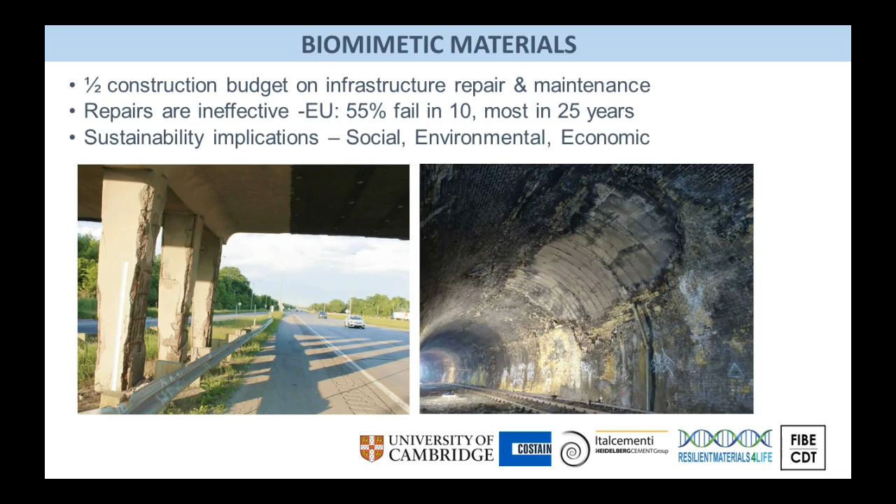Also environmental, we've heard that concrete is one of the most damaging construction materials, and of course economic, due to budget constraints. So over the last year, scientists have looked to develop what we call biomimetic materials. These are basically materials that are inspired by nature, by all the living organisms. And we mean materials that can adapt and respond to their external environment. And in the context of construction materials, we mean materials that can self-sense their condition, they can self-diagnose the condition, and then repair in case they're damaged.

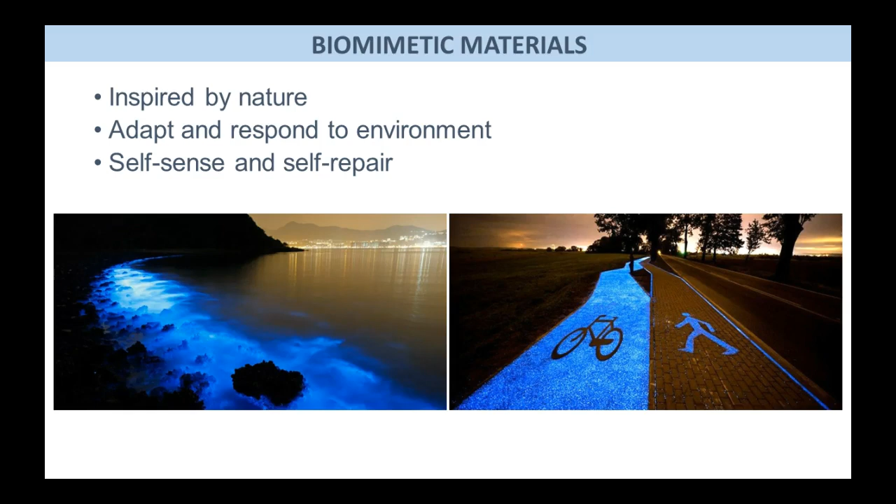And we have already seen some commercial success stories. For example, scientists have been inspired by organisms that glow in the dark to then develop pavement that glows in the dark in the same way. I work as part of a larger group of PhD researchers called Resilient Materials for Life. And this is a collaboration between the University of Cambridge, Bath, Cardiff, and Bradford, and we are funded by EPSRC.

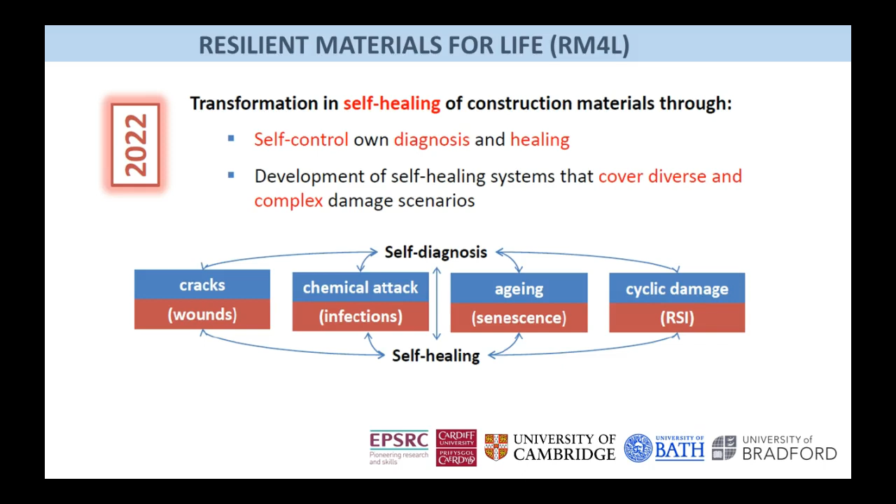And the aim of the program is that by 2022, we will investigate biomimetic materials that can self-diagnose their condition, and then they can self-heal if they're damaged. And we're working across 4 different themes that you can see here. So one is physical cracking, chemical attack, aging, and also cyclic damage. So we are looking to develop materials not only that self-heal, but can also self-diagnose without the need for an external intervention. So I've mentioned self-sensing. What do I actually mean by self-sensing?

You're all in this room very familiar with sensor technologies. However, some of the challenges with external sensors, that are attached or embedded in the structure, is that often they're associated with very high costs to either install or to maintain across the life cycle of the project. Some of them also lead to very low sensitivity or incompatibility with the actual structure. And also, the sensors themselves sometimes are not very durable, so they might not last for 100 or 120 years that a structure is expected to last. And as Sakthi mentioned earlier, visual surveys are still the norm for pretty much every infrastructure owner. So they depend on an engineer actually going out once every 2 or 4 years to physically inspect if there's any cracking.

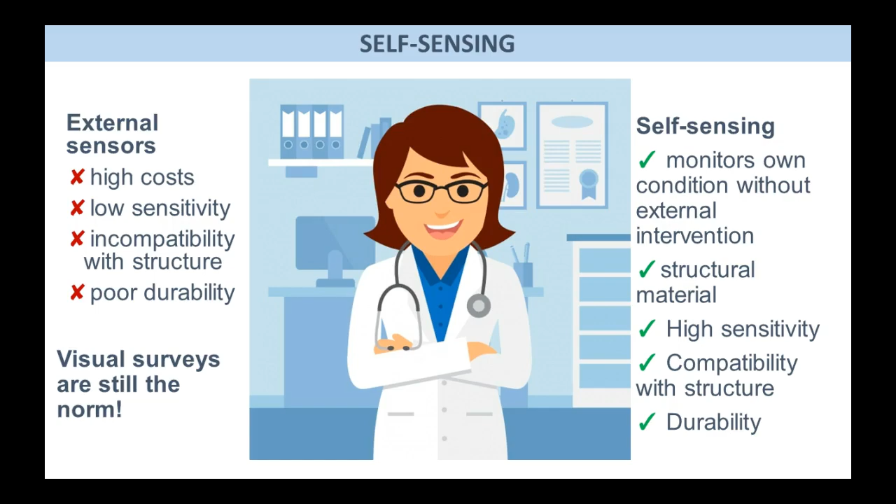But what we mean by self-sensing is that the structural material itself can monitor its condition without any external intervention. And the good thing about this is that the sensing material is the actual structural material. So it has natural compatibility with the structure, natural high sensitivity, and of course durability. So as an example, what I'm looking on is self-sensing concrete. So the concrete itself remains a structural material, but it also has the added-on functionality of sensing its own condition. And to generate that self-sensing aspect, I'm using the nanomaterial of graphene.

So graphene was isolated back in 2004 by the exfoliation of graphite. And then the researchers that discovered graphene won the Nobel Prize in Physics for their discovery. So graphene has some very unique properties. It is the thinnest possible material that you can find, but also at the same time it is the strongest known material on Earth, and it is estimated that it is roughly 200 times stronger than structural steel. It is extremely lightweight as well, which is another benefit for its use in structural composites. It has very high Young's modulus and flexibility along with fracture strength. And another useful property is that it has some barrier properties that we can explore for durability applications.

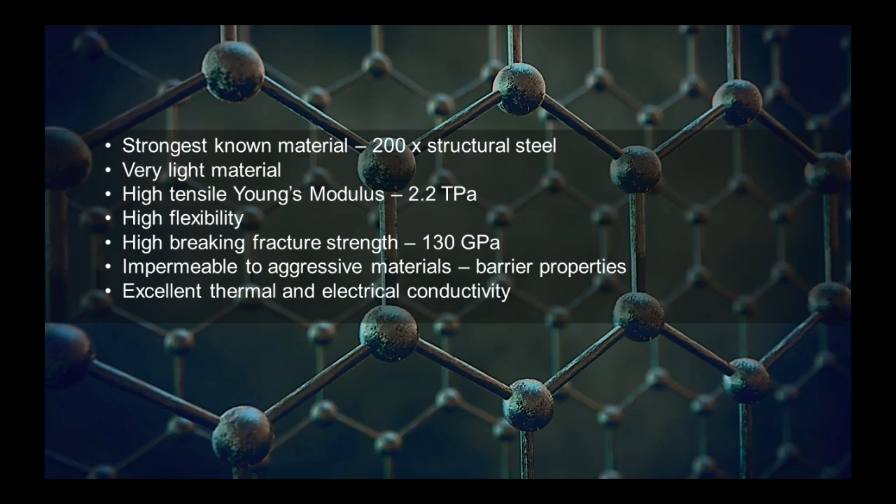And the property I'm looking to take advantage of is the electrical conductivity. So graphene is one of the best electrical conductors, so I can use that to generate the self-sensing mechanism. And it is important to point out at that stage that over the last 5 years at least, there have been a lot of papers on graphene in various composites, not only concrete but also steel and polymers.

And when people say graphene, there are actually many different graphene materials. So graphene doesn't only mean one thing. We have this graphene, which is a graphene that was discovered back in 2004, and this is a single-layer graphene. We also have graphene oxide, which is the middle one. The graphene oxide has oxide groups that then allow it to mix very well in water and hence concrete. We also have reduced graphene oxide, which again is another type of graphene.

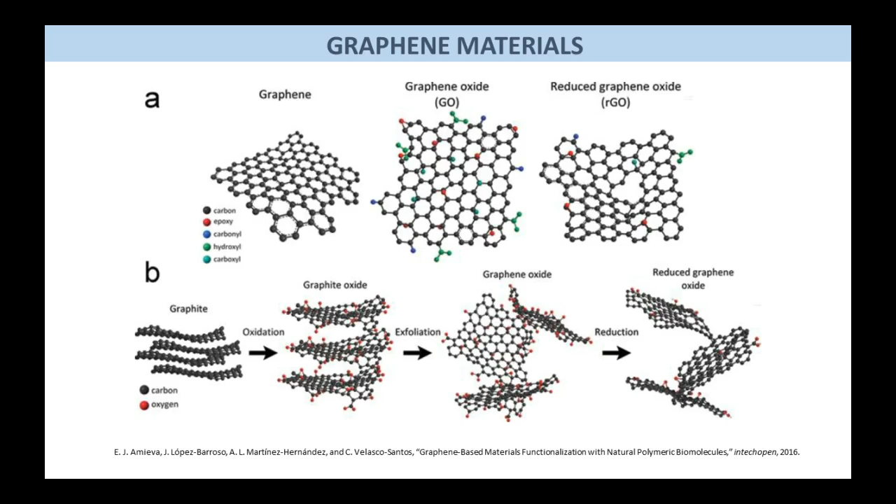And unfortunately in the literature it's not always clear what type of graphene is used, how many layers it has, and all these properties actually affect the resultant properties of the composite at the end. And in terms of graphene cement composites, I'm using a multi-layer form of graphene, so not the very thin, one-layer graphene, because that would be prohibitively expensive for anything in concrete. But I'm using something called graphene nanoplatelets, which have about 40 nanometers thickness.

And there is some general agreement in the literature as to what is the effect of graphene nanoplatelets when they're added in cement mortar or cement paste. And in general, the fluidity of the mix decreases dramatically. I think all authors agree on that, because graphene is a nanomaterial and it is very difficult to mix. And also we have seen improvements in strength and then a consequent improvement very often in the durability parameters as well. And very importantly for me and my self-sensing is that the electrical conductivity increases significantly when you mix graphene in your concrete.

However, the challenge in the literature is that authors use different percentages of graphene. They get different percentage improvements in strength. And also, even if people use 0.1% graphene, let's say, some found a 5% increase in strength, and others found a -10% change in strength. So there is still not a definitive answer as to how much graphene you need to add in concrete and whether that graphene has a beneficial effect, especially in terms of strength.

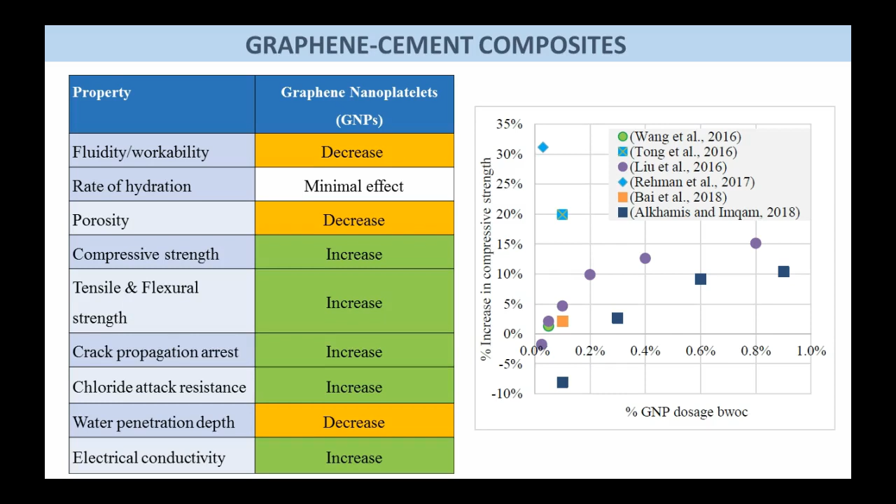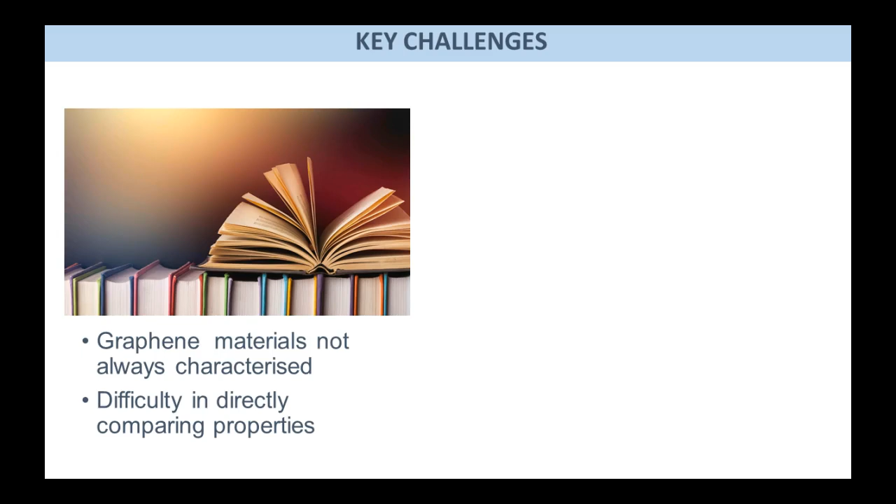So over the last 2 years of my PhD, I've tried loads of different mixing methods, loads of different chemicals and mechanical methods to find an okay method to disperse it homogeneously. And we've done a lot of work with that, with Heidelberg Cement, to understand that homogeneity when you mix.

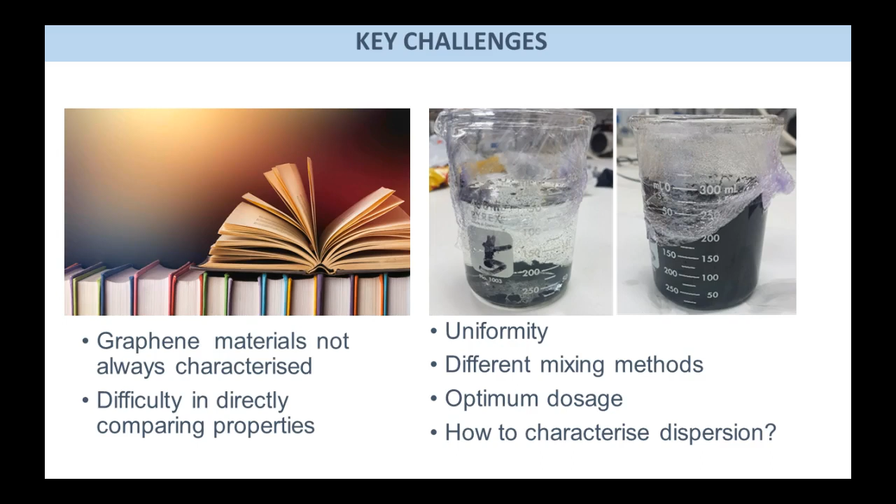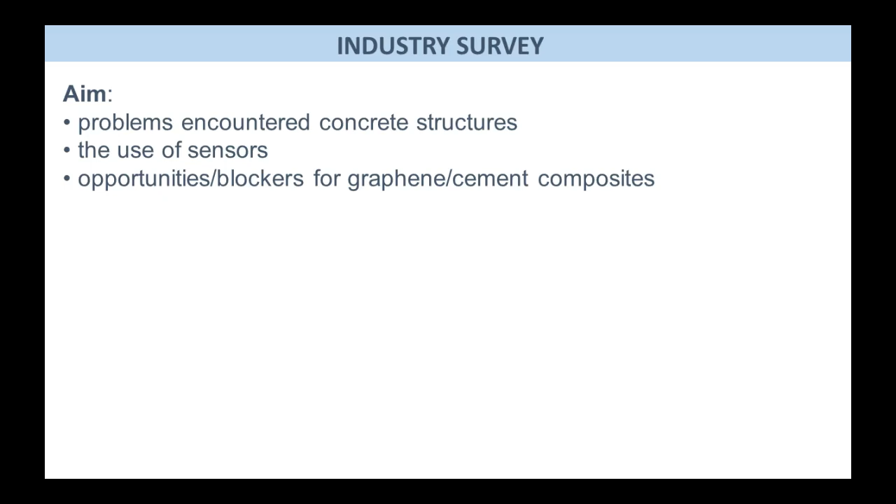And then we ran an industry survey last year, and a lot of people in this room have answered, so thank you very much. And we tried to understand what are the actual problems encountered with concrete structures and the current use of sensors, and whether graphene could help in solving some of these challenges. So we wanted to identify the high-value areas where we could make our graphene work for the industry.

Just a bit of background: I sent my survey to around 300 to 400 people in the industry. I've got 78 respondents back. Due to my contracting background, I guess over half are from contractors, so the results might be biased a bit from that. We had over 55% with 15 years experience, and most of them are UK based as well.

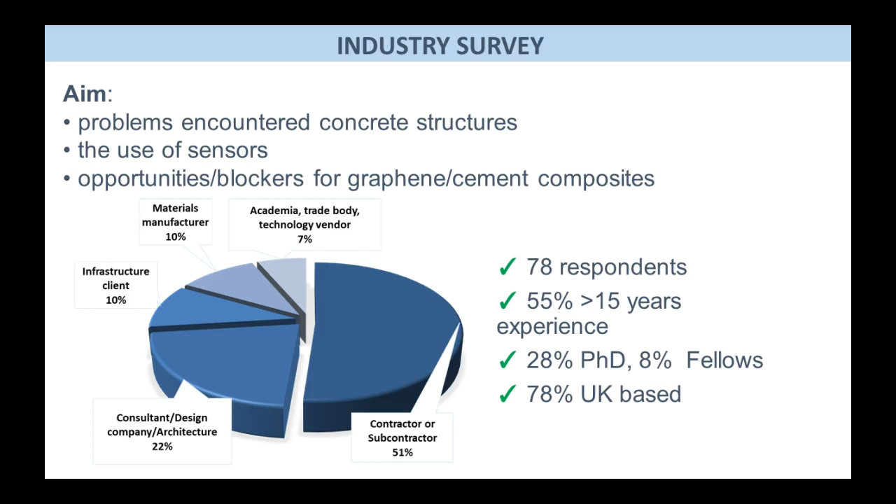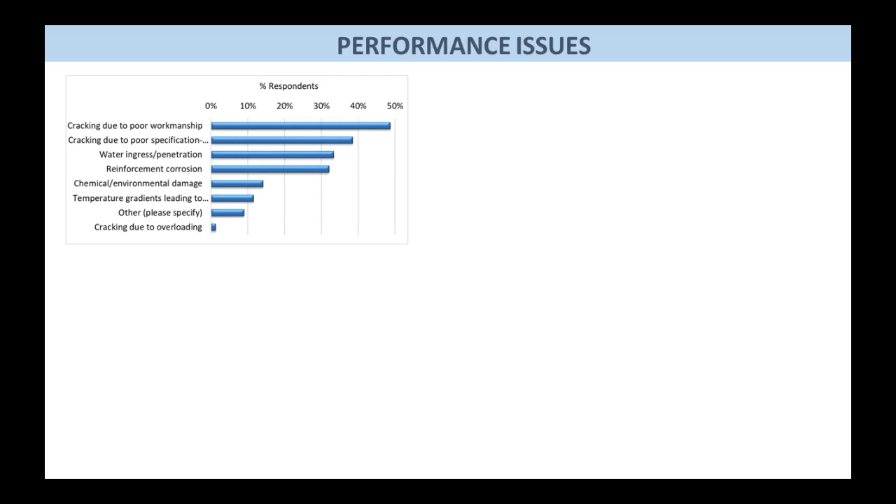So in terms of concrete performance issues, the biggest challenge, and maybe that comes from the contracting aspect, is that cracking due to poor workmanship was identified as one of the key challenges in terms of damaging concrete. Also cracking due to poor specification, followed by water ingress and penetration. And what was interesting to see is that any cracking or any defect in concrete in most cases led to immediate repair of the structure.

And then it was followed by enhanced monitoring of the structure. So actually, a lot of the infrastructure owners need to go out and repair immediately or improve their monitoring frequency.

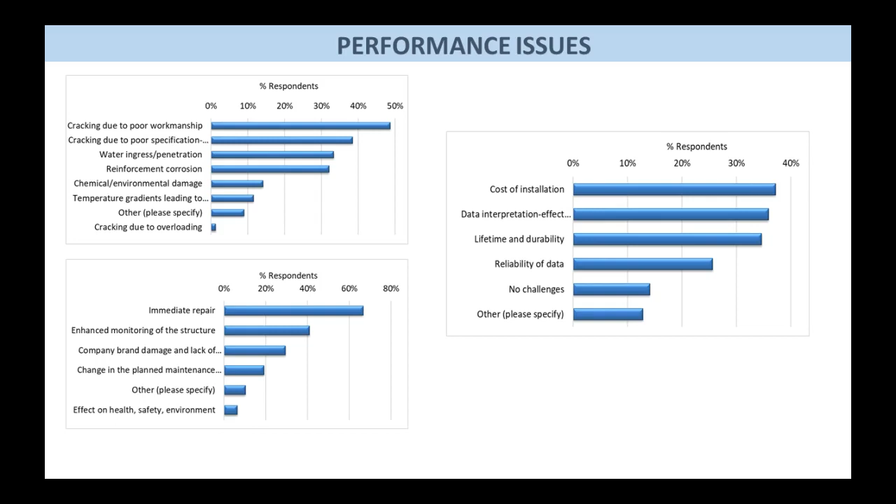And when I then asked about these sensors, if they have identified any key challenges, the cost of installation of the sensor is very high, followed by the data interpretation. So what happens very frequently is that we install sensors, but then the actual engineers don't know how to interpret the data and they don't know the right time to intervene. Of course, lifetime and durability of the sensor was another concern, followed by reliability of the data. And it was encouraging to see that 15% found no challenges, so that's good.

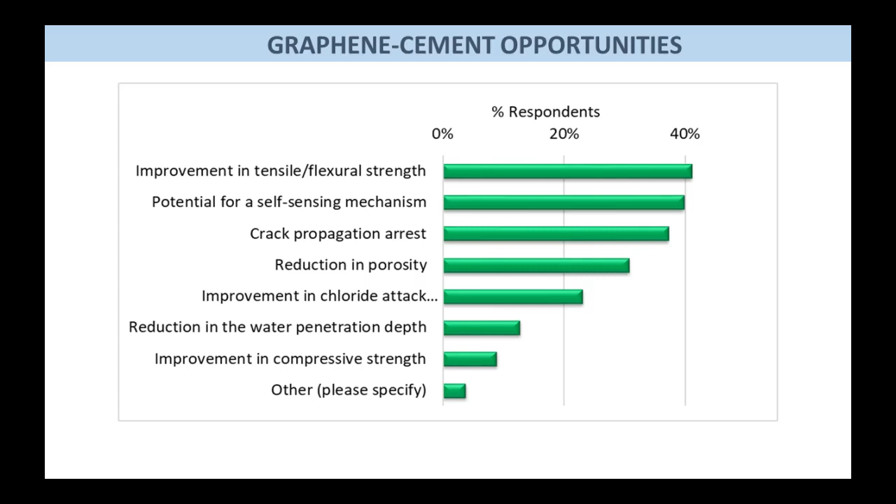So when I then asked about what are the biggest opportunities, what do you want a graphene cement composite to do for you, you can see that the biggest priority, these two, were really an improvement in tensile and flexural strength, followed very closely by a self-sensing mechanism. So what I get from this graph is that the industry is not really interested in an improvement in compressive strength, because you can get strength improvements with most of the admixtures that you currently have. You can get it through a robust mix design. What people want to see is an improved functionality that you wouldn't have with a change in the mix design.

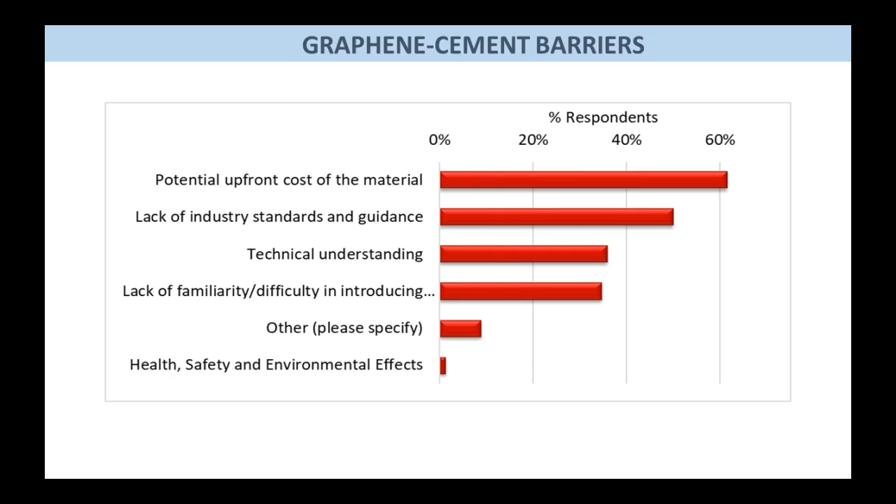And in terms of barriers, this keeps coming up in every single presentation. The cost of the material is the perceived main blocker of introducing graphene as a nanomaterial. Also, this is followed by the lack of industry standards. The industry is very conservative, so it is very hard to convince anyone to even take a trial on something like graphene in concrete yet. So the standardization bodies really need to drive the introduction of new materials. And again, lack of technical understanding, I guess, is expected as it is a very novel research area. I was very, very surprised to find that health and safety and environmental effects weren't really a concern for people.

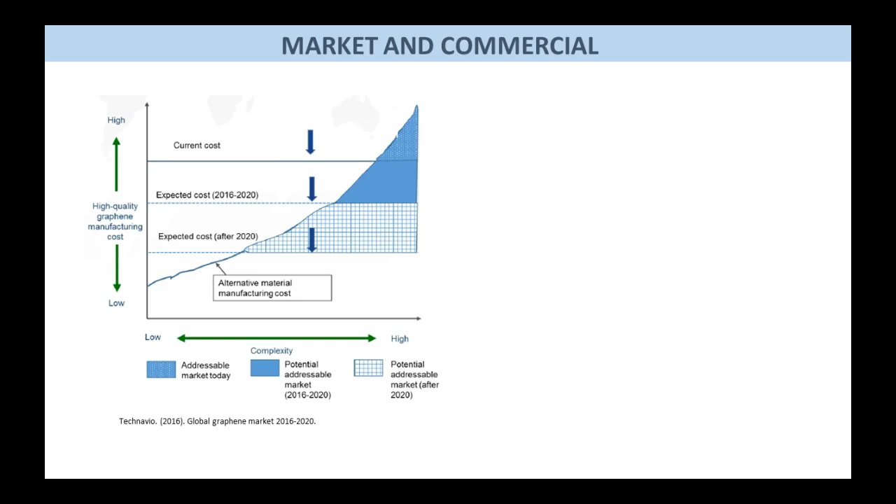So just to be clear on the cost, graphene currently is very expensive. It is an expensive material to use, but it also depends a lot on the actual graphene type that you use. So if you use the ultra-thin graphene, this can cost over £1,000 per gram, and is used by companies like Samsung, Apple, to use in advanced electronics. If you use the graphene I use for concrete, it is much, much cheaper. It's roughly £200 to £300 per kilo, so we are talking about a completely different scale. Graphene is extremely dependent on the manufacturing process. So if you don't want the super pure graphene, then the cost comes down significantly, of course.

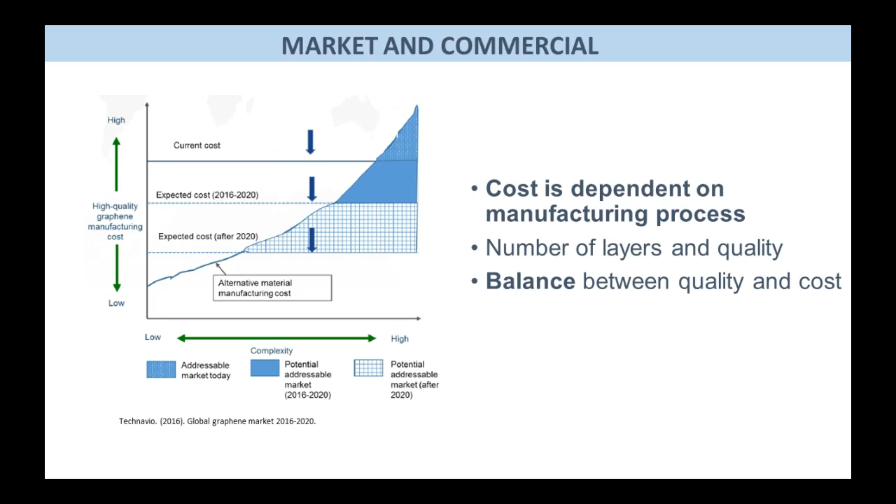And again, the number of layers and quality is a big thing. So in general, as you go down in the number of layers, the more expensive it becomes. And for us in infrastructure, concrete is a commodity material, so we really need to find the right balance between the quality of any material that we would use and the cost to the user. And again, graphene research is very new, so the cost is expected to come down significantly as the process is scaled up.

And I know it didn't come up as a concern, but I think health, safety, and the environment is a very important consideration. So here in the UK, the Health and Safety Executive has done a lot of work on the use of nanomaterials at work. And a lot of the admixtures that we currently use in concrete, they are comprised of nanomaterials. So I would urge you to familiarize with these because nanomaterials are everywhere, basically.

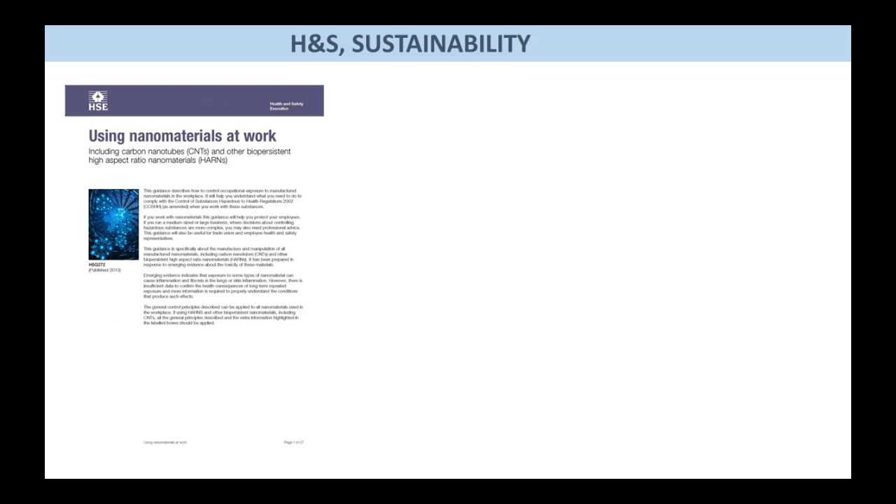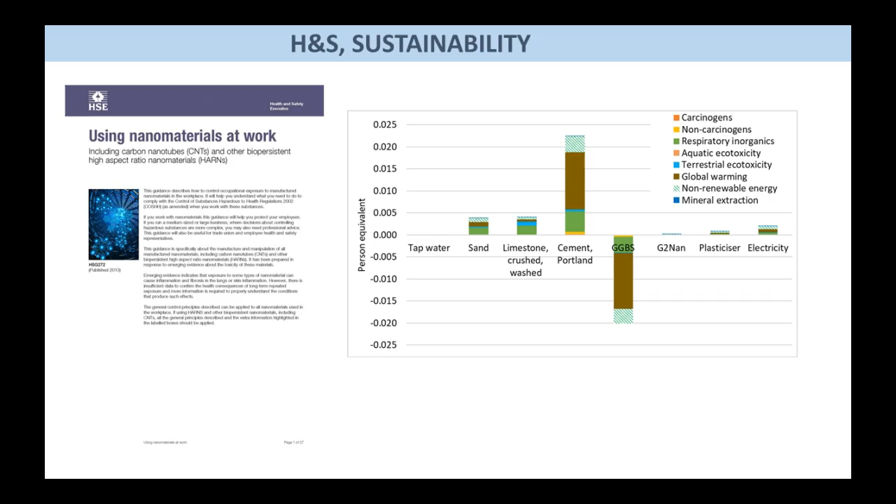And in terms of sustainability, we've run very recently the first ever life cycle assessment of using graphene in concrete. And what we actually found was that if you look from GGBS to the left, this is a standard concrete mix design. What we found was that our graphene product, which is this one, has really a tiny effect on the environmental sustainability of the whole mix design. And the biggest impact by far is the use of Portland cement. So if we could somehow reduce Portland cement whilst giving the same functionality to our concrete mix design, this is where our sustainability benefit would really be evident. So yes, this is a graphene product, minimum effect. The actual plasticizer has 3 times more effect compared to graphene.